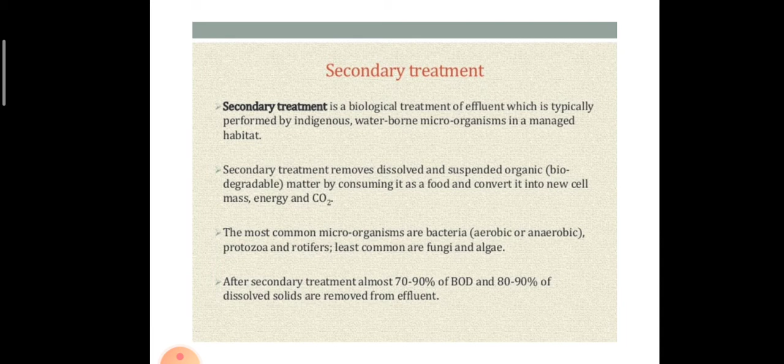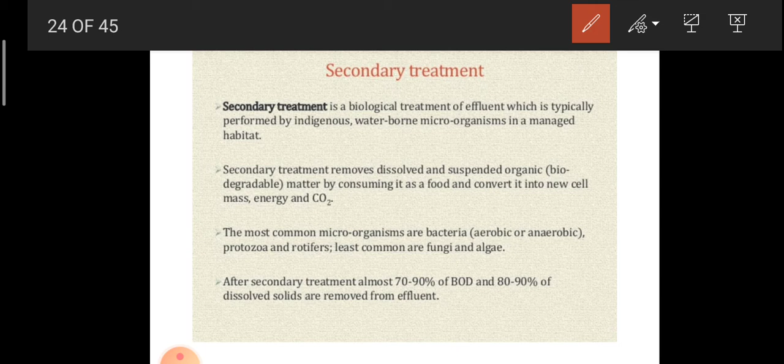The most common organisms are bacteria, aerobic or anaerobic. Make note of it. The most common microorganisms are bacteria, aerobic and anaerobic, protozoa and rotifers. Least common are fungi and algae.

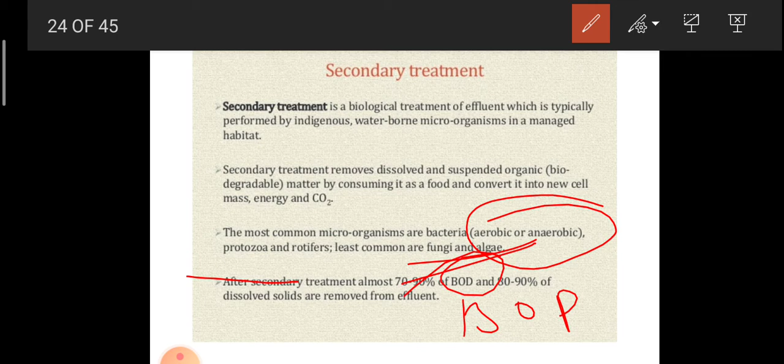After secondary treatment, almost 70 to 90% of BOD, that is biological oxygen demand, and 80 to 90% of dissolved solids are removed from effluent.

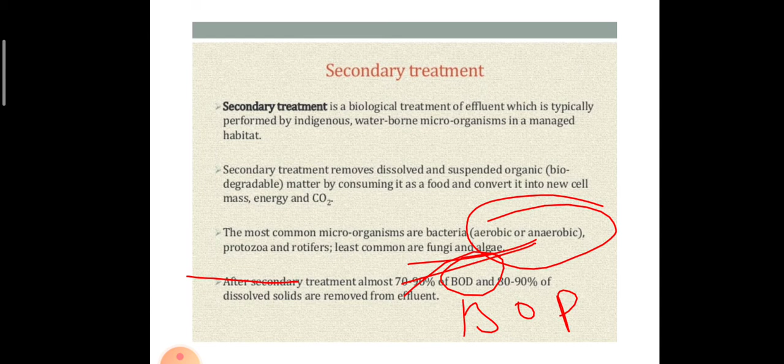Now the trickling tower: the principle involved for the treatment of waste is trickled filtration. Here we provide more space for the surface exposure. In trickling filter treatment, wastewater is sprayed through a sprinkling, rotating arm on circular beds, which consist of 3 to 10 feet deep coarse media of crushed stones, gravels, or synthetic materials.

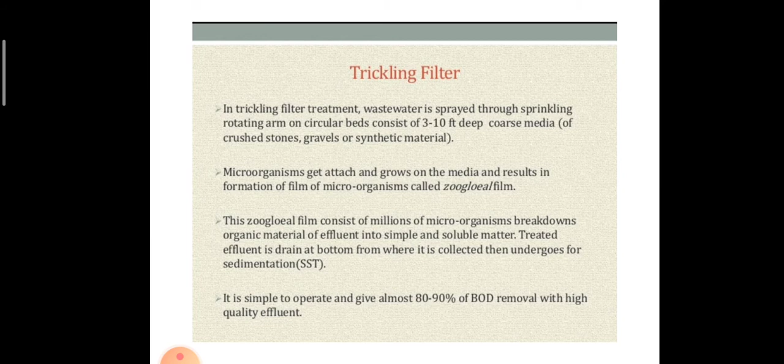Microorganisms get attached and grow on the media, resulting in formation of a film of microorganisms called zoogloeal film. This zoogloeal film consists of millions of microorganisms. Millions of microorganisms break down organic material of effluent into simple and soluble matter.

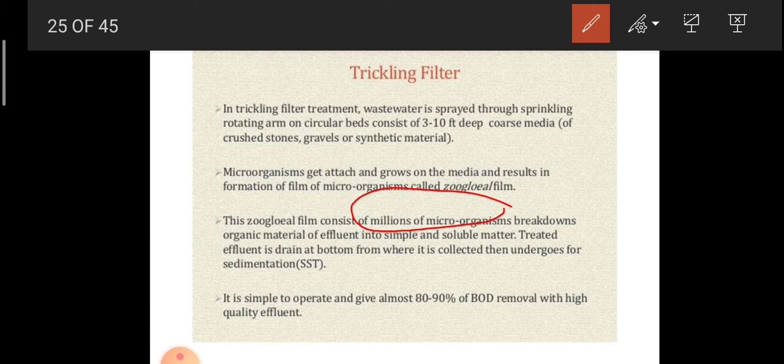Treated effluent is drained at the bottom, collected, and then undergoes sedimentation. It is simple to operate and gives almost 80 to 90 percent BOD, biological oxygen demand, removal with high quality effluent.

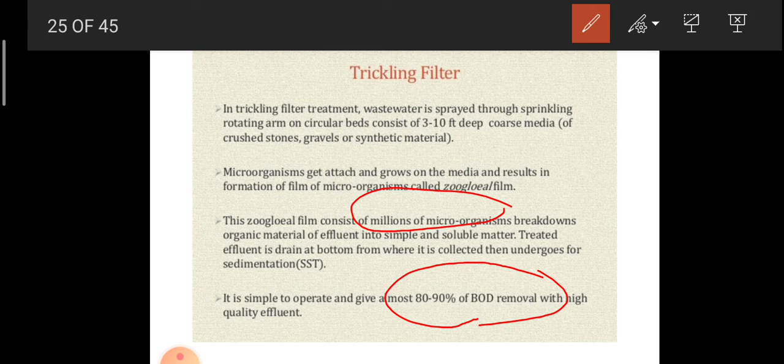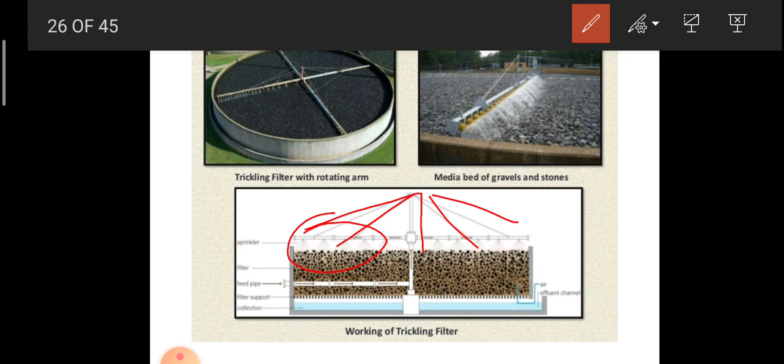Now look at this trickling tower with a rotating arm. The second picture shows media bed of gravels and stones. The third image shows the working of trickling tower. Look at this, how it sprays, various branches and showering. Look at the working of trickling filter.

The treatment of waste is by trickled filtration. Here we provide more space for the surface exposure. The effluent undergoes filtration after the action of bacteria and other microorganisms. The method is also valuable to reduce BOD. Among the widely discussed or recommended methods of waste management which promise to meet the threshold values for the discharge of effluents, the following options are of special interest to the tanners.

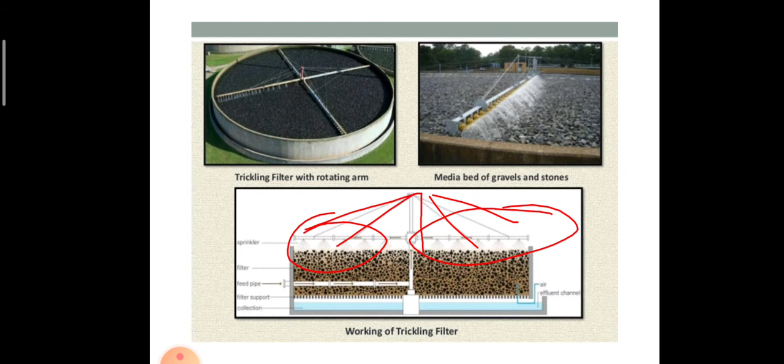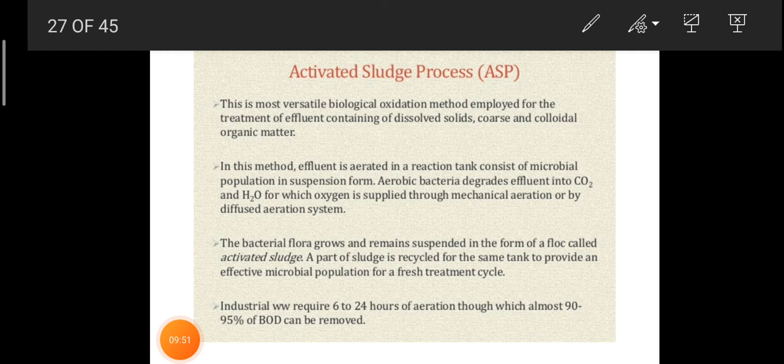In this method, effluent is aerated in a reaction tank which consists of microbial population in suspension form. Please make note of it. Aerobic bacteria degrade effluent into carbon dioxide and H2O, for which oxygen is supplied through mechanical aeration or by diffused aeration system.

The bacterial flora grows and remains suspended in the form of a floc called activated sludge, AS. A part of sludge is recycled to the same tank to provide an effective microbial population for a fresh treatment cycle.

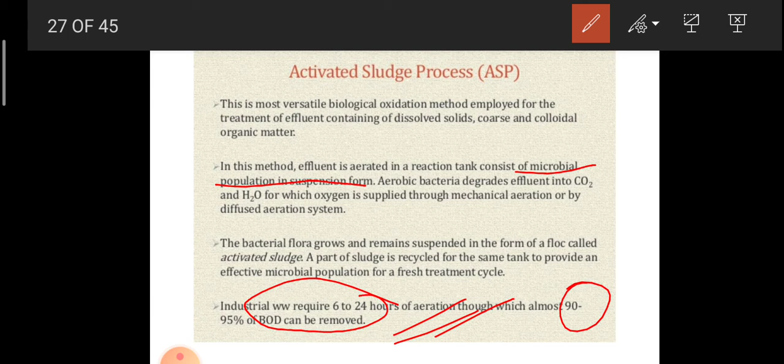Industries require 6 to 24 hours of aeration, through which almost 90 to 95% of BOD, biological oxygen demand, can be removed. Underline, very important point. With 6 to 24 hours of aeration, how much? 90 to 95% of BOD can be removed.

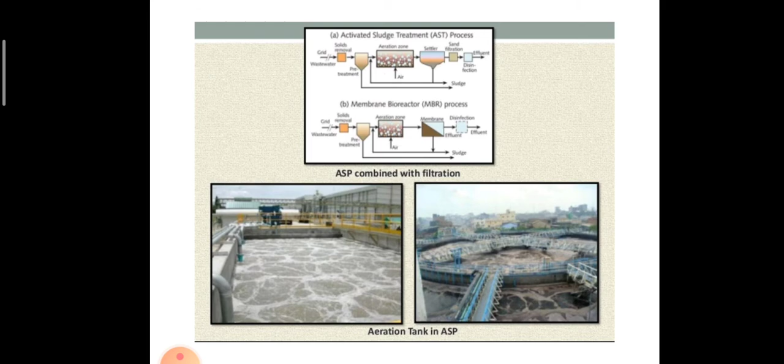Now look at this activated sludge process combined with filtration. Look at the picture. This is the wastewater, this is the solid removal, this is pre-treatment. Now air, the aeration zone. Now settling. Next here is sand filtration, here effluent disinfection.

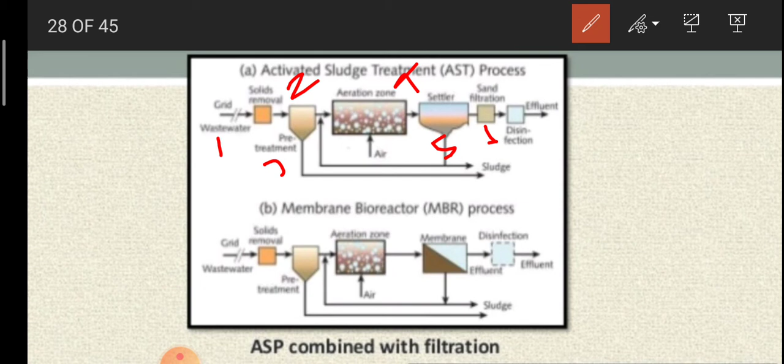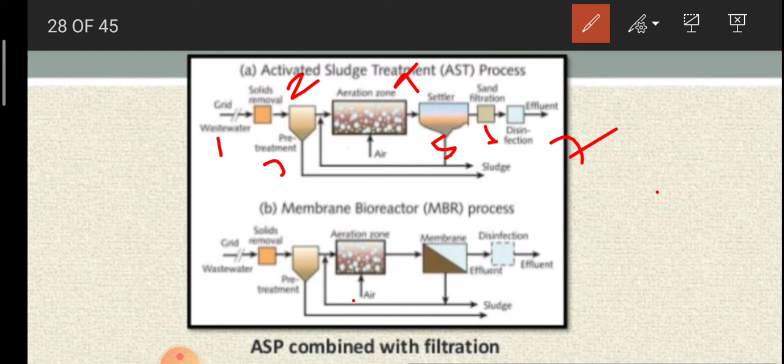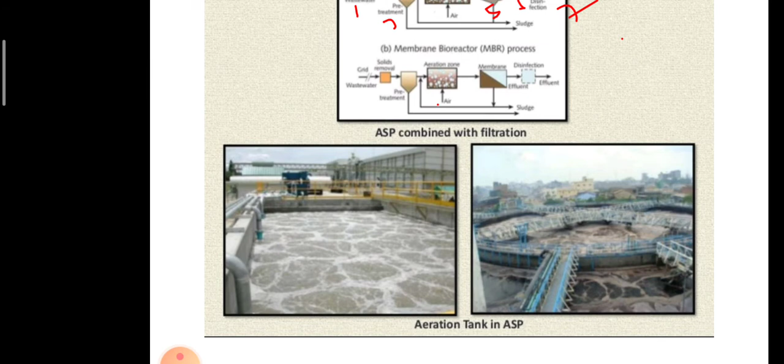Now membrane bioreactor process. Look at this, ASP combined with filtration. Now this is the aeration tank in ASP, where we are rotating the motor. Look at this aeration tank.

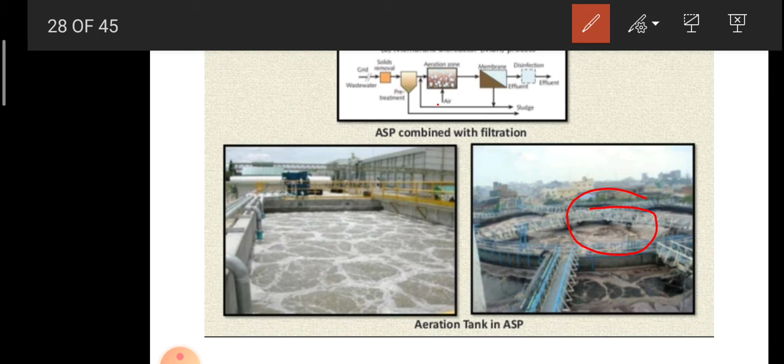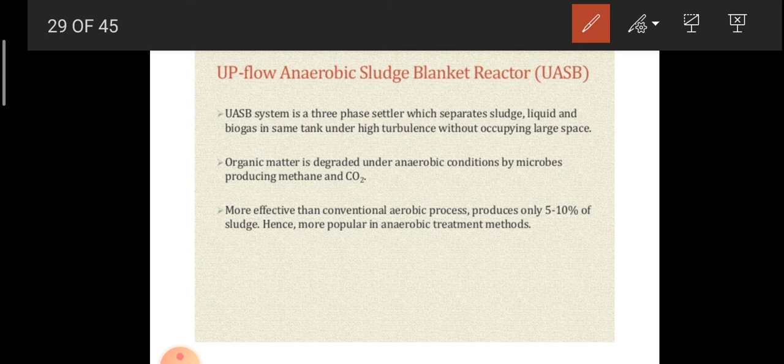Now this is the chart for the upflow anaerobic sludge blanket reactor. We simply call it UASB. The system is a three-phase settler which separates sludge, liquid and biogas in the same tank under high turbulence without occupying large space.

Organic matter is degraded under anaerobic conditions by microbes producing methane and carbon dioxide. It is more effective than the conventional aerobic process, producing only 5 to 10% of sludge, hence it is more popular among anaerobic treatment methods.

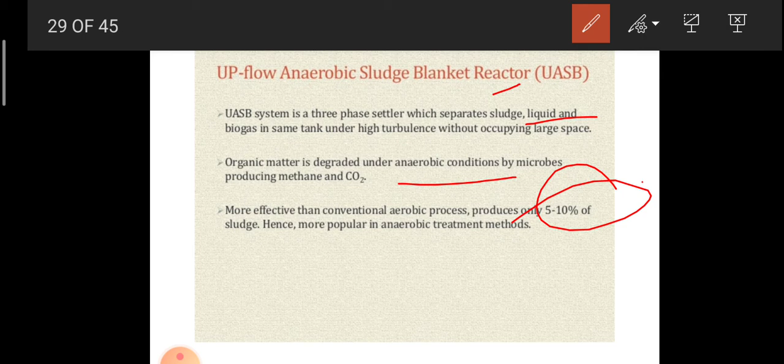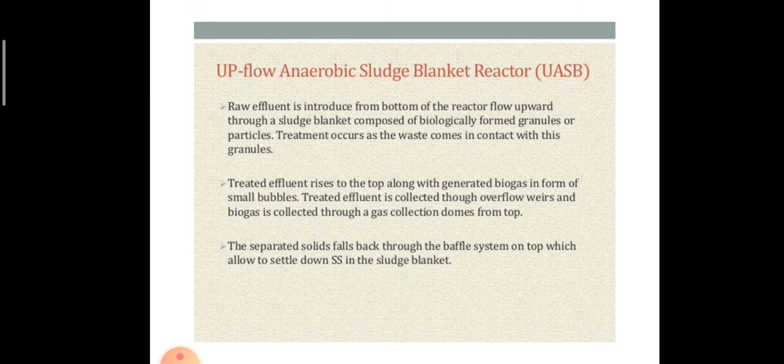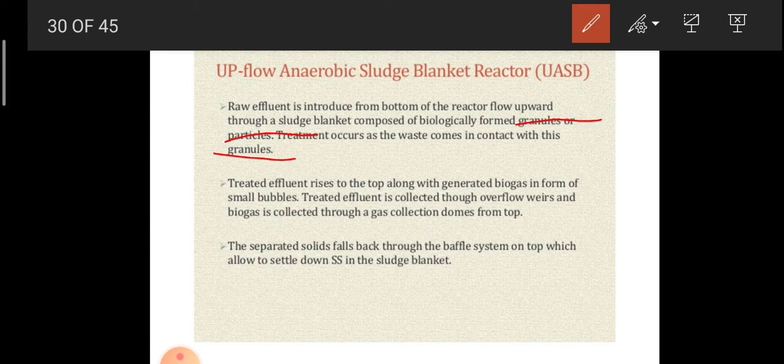Raw effluent is introduced from the bottom of the reactor and flows upward through a sludge blanket composed of biologically formed granules or particles. Two things to remember here: granules and/or particles. Okay. Treatment occurs as the waste comes in contact with these granules.

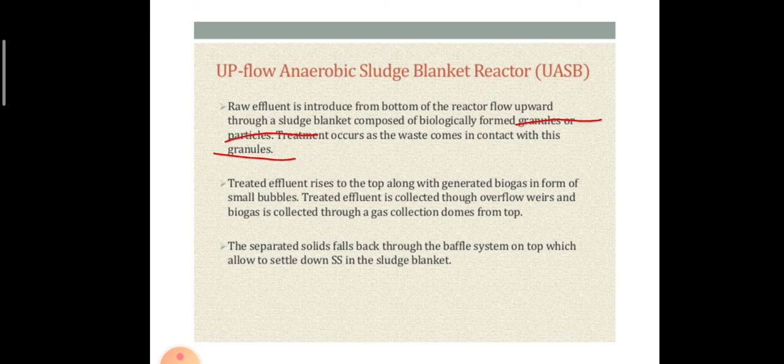Treated effluent rises to the top along with generated biogas in the form of small bubbles. Treated effluent is collected through overflow weirs and biogas is collected through gas collection domes from the top. The separated solids fall back through the baffle system on top, which allows suspended solids to settle down in the sludge blanket. UASB working mechanism, UASB tank with a gas holder dome.

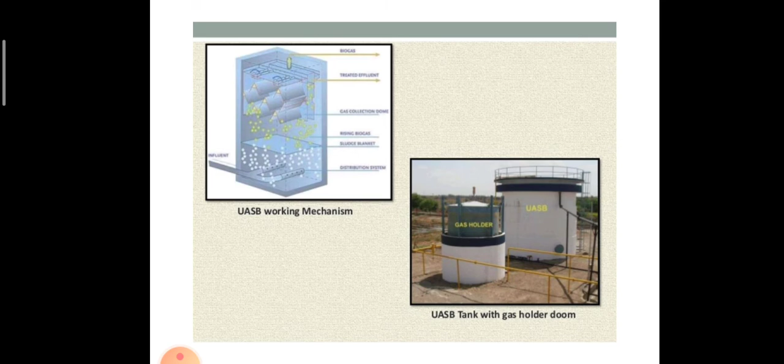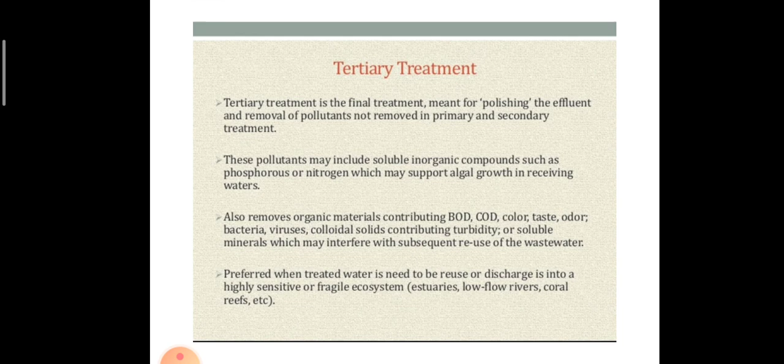Now look at the tertiary treatment. In the case of tertiary treatment, this is the final treatment meant for polishing the effluent and removal of pollutants not removed in primary and secondary treatment. So tertiary treatment is the final treatment.

These pollutants may include soluble inorganic compounds such as phosphorus or nitrogen, which may support algal growth in receiving waters. Now, it also removes organic materials contributing biological oxygen demand, chemical oxygen demand, color, taste, odor, bacteria, viruses, colloidal solids contributing turbidity, or soluble minerals which may interfere with subsequent reuse of the wastewater.

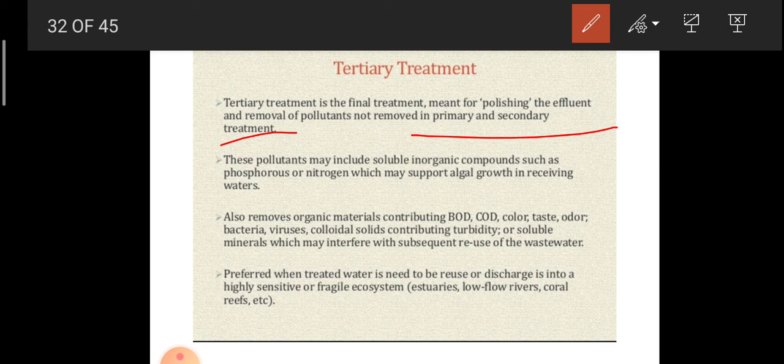It is preferred when treated water needs to be reused or discharged into a highly sensitive or fragile ecosystem. Tertiary treatment is an additional cost to the treatment process, but produces high quality effluent which can be reused further for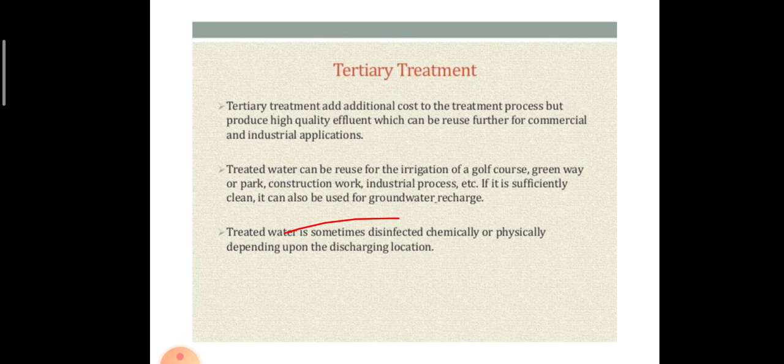commercial and industrial applications. Hello students, please make note of it. Tertiary treatment is an additional cost to the treatment process but produces high quality effluent which can be reused further for commercial and industrial applications.

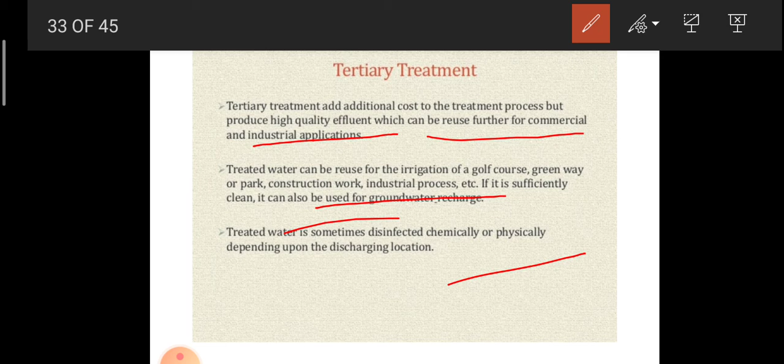Treated water can be reused for the irrigation of golf courses, greenways or parks, construction work, industrial processes, etc. If it is sufficiently clean, it can also be used for groundwater recharge. Treated water is sometimes disinfected chemically or physically depending on the discharging location.

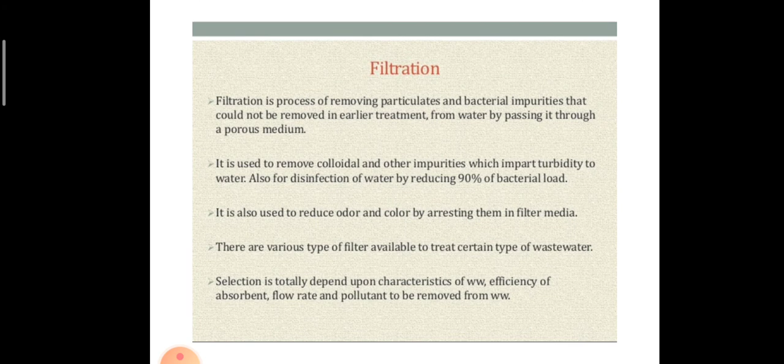Filtration is the process to remove particulates and bacterial impurities that could not be removed in earlier treatment from water by passing it through a porous medium. It is used to remove colloidal and other impurities which impart turbidity to water, and also for disinfection of water by reducing 90% of bacterial load. It is also used to reduce odor, that is smell, and color by arresting them in the filter media.

There are various types of filters available to treat certain types of wastewater. Selection totally depends upon the efficiency of the adsorbent, flow rate, and pollutant to be removed from wastewater. WW is wastewater. Okay.

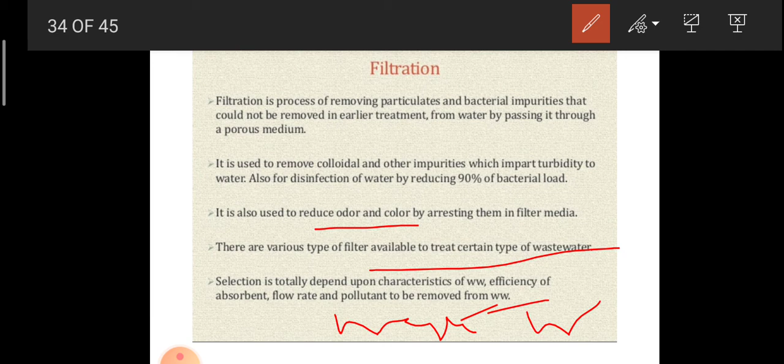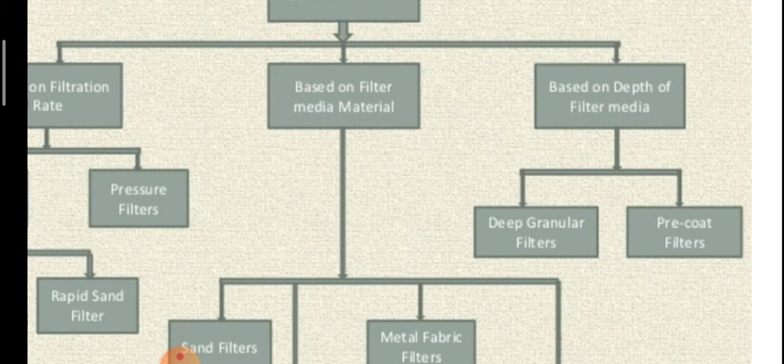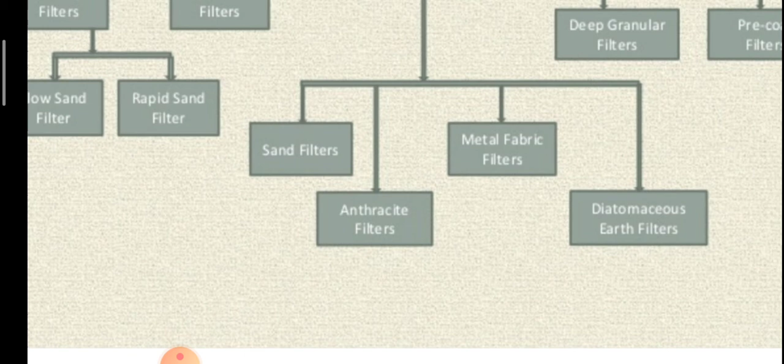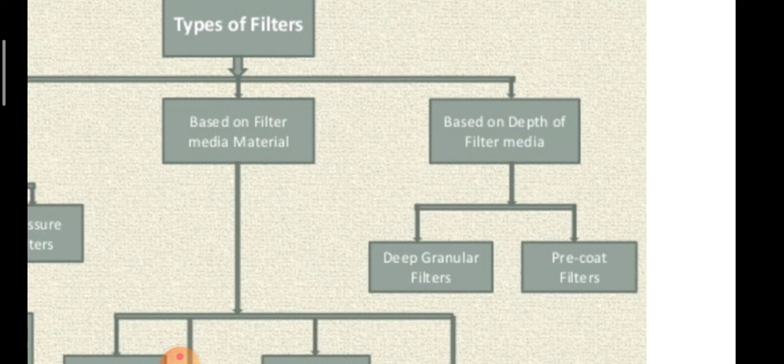Types of filters: based on filtration rate, based on filter media material, based on depth of filter media. Based on filtration, two types: gravity filters and pressure filters. Once again, gravity is slow sand filter and rapid sand filter. Based on filter media material: sand filters, metal fabrics, diatomaceous earth filters, and anthracite filters. Whereas based on depth of filter media: deep granular filters or pre-coat filters.

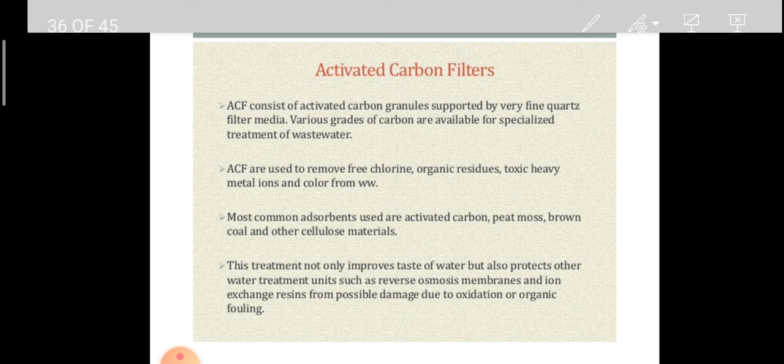Next one is activated carbon filters. They consist of activated carbon granules supported by very fine quartz filter media. Various grades of carbon are available for specialized treatment of wastewater. ACF, activated carbon filters, are used to remove free chlorine, organic residues, toxic heavy metal ions, and color from wastewater. The most common adsorbents used are activated carbon, peat moss, brown coal, and other cellulose materials.

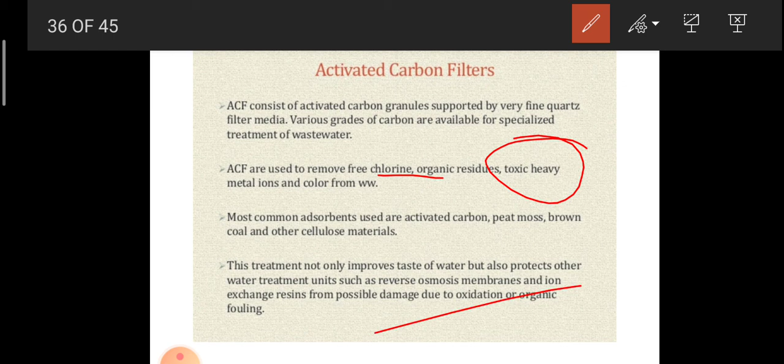This treatment not only improves the taste of water but also protects other water treatment units such as reverse osmosis membranes and ion exchange resins from possible damage due to oxidation or organic fouling. Different media used for ACF. Now ACF tubes or channels. Look at this picture.

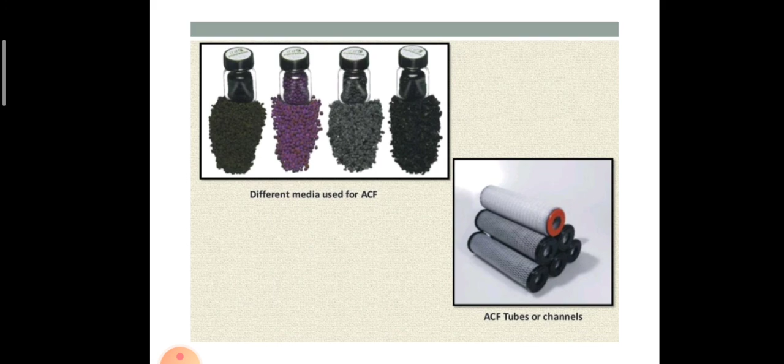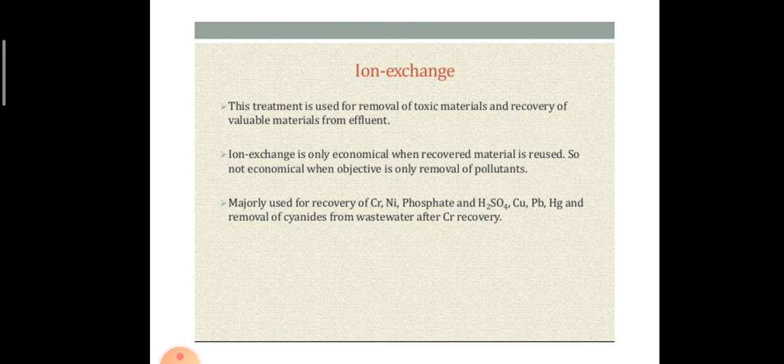Ion exchange. This treatment is used to remove toxic material and recover valuable materials from effluent. Ion exchange is only economical when recovered material is reused, so it is not economical when the objective is only removal of pollutants. It is mainly used for recovery of chromium, nickel, phosphate, sulfuric acid, copper, lead, mercury, and removal of cyanides from wastewater after chromium recovery. So this is one picture from Tata Motors Pune.

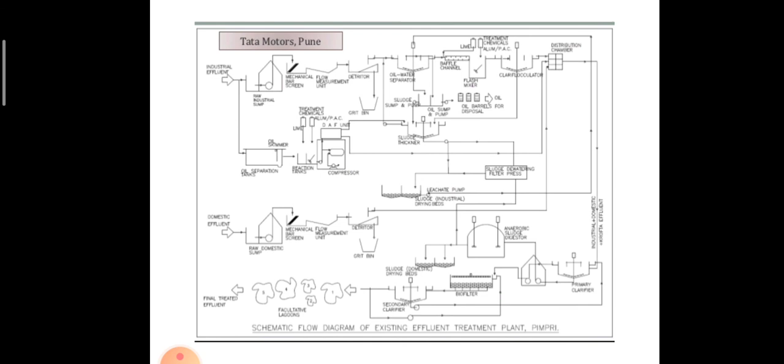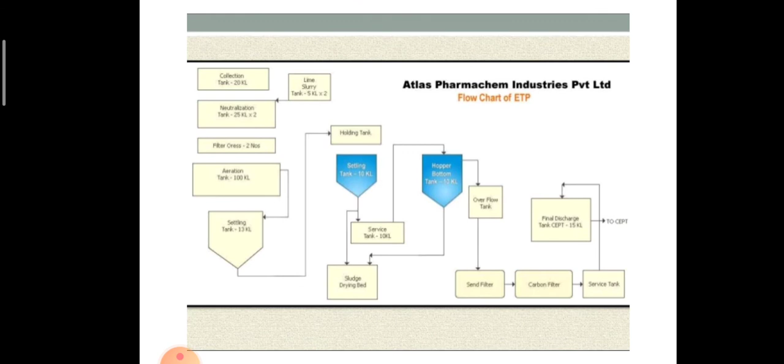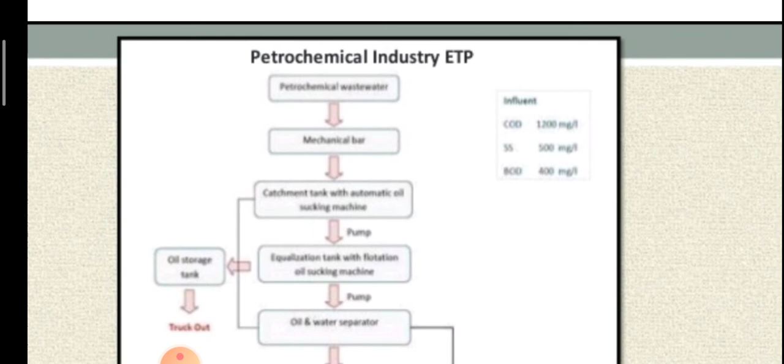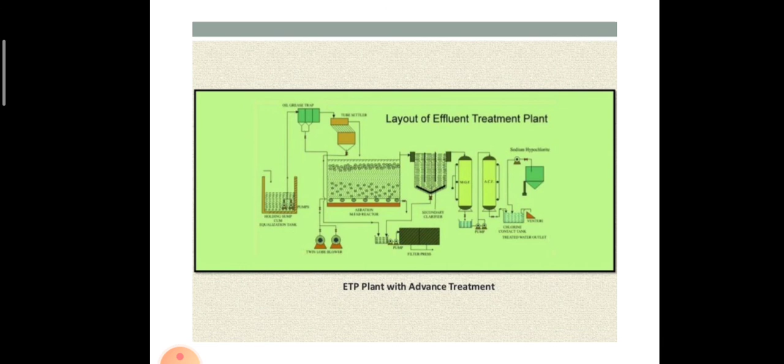These effluent treatments are very expensive, hence scientists try to find a suitable and inexpensive method. After repeated experiments, it has been found that domestic sewage contains the right type of microorganisms in the right proportion, which can biologically degrade the organic matter present in tannery effluent. After primary treatment, tannery effluent can be disposed of in the sewer in a 1:10 proportion of tannery effluent to sewage. So with this I conclude the topic effluent treatment plant.